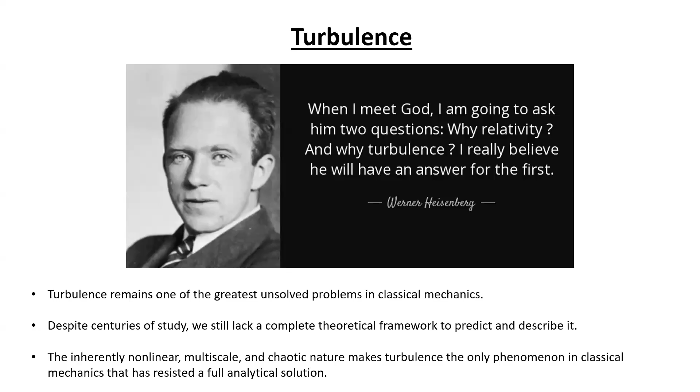So, no doubt, turbulence remains one of the greatest unsolved problems in classical mechanics. In spite of studying turbulence over centuries, we still lack a complete theoretical framework to predict and describe it. The inherently nonlinear, multiscale and chaotic nature of turbulence makes it the only phenomenon in classical mechanics that has resisted a full analytical solution. So, in short, turbulence is still not fully known.

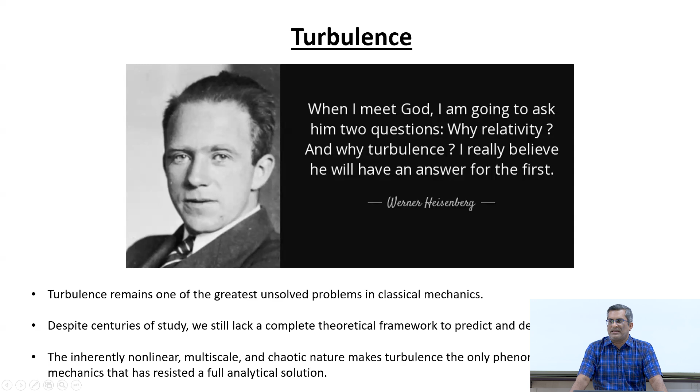Okay, so now why is this the case? Let us see that. For that purpose, first we will have to look at some key characteristics of turbulent flow.

Turbulent flow as such is so vast and includes so many different aspects that it is not possible to include everything in one full course.

So here what we are going to do is I will only give a brief background on the theory of turbulence, such that it will be helpful later when we discuss numerical techniques for turbulent flow and, importantly, particle turbulence interaction. So I will only briefly present the essence of turbulence.

So what are the typical characteristics of turbulent flows? Usually, we assign unsteadiness to turbulence. We say that if a flow is unsteady, it is turbulent, which is not fully correct.

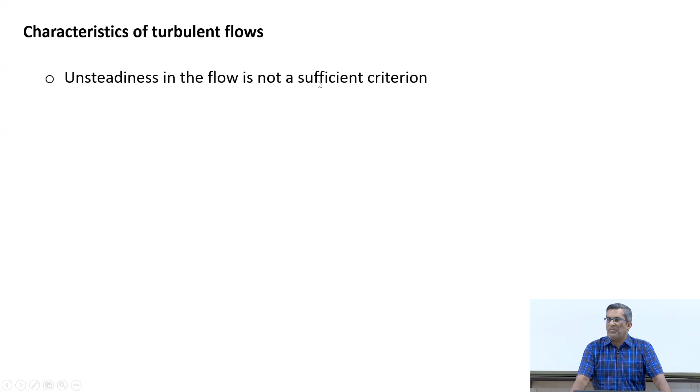Unsteadiness in the flow is not a sufficient condition. It may be a necessary condition. And this is also closely related to the misconception around this equation. When we talk about turbulence, we immediately write this equation and say, okay, now I can decompose the velocity of the fluid into mean and fluctuation. But just because you can write this equation for a flow does not mean that the flow is turbulent.

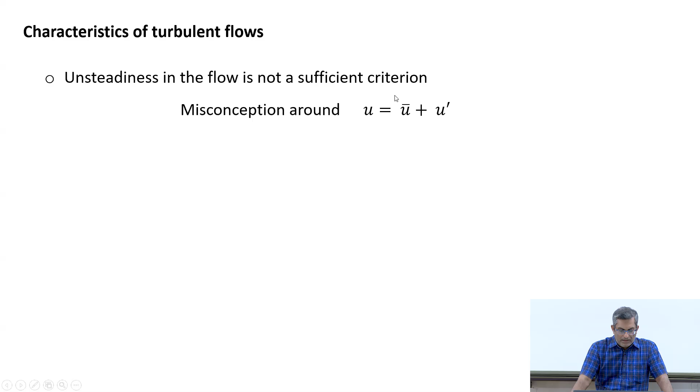Why is this so? Let us look at the flow behavior past a cylinder. Here you have a laminar flow past a cylinder, with Reynolds number about 100. Here you can clearly see the vortex shedding. For this Reynolds number around 100 or so, we will see periodic shedding of vortices behind the cylinder.

If you consider any point, say here in the wake, and plot velocity, you can expect something like this. If I take the mean of this flow field, this will be my u mean, and this would represent the fluctuations. So does this mean that the flow is turbulent here? The answer is no. This is not turbulent, even if we can have velocity fluctuations.

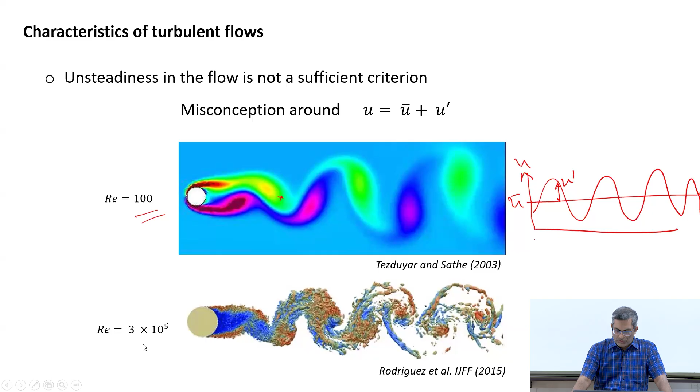Now consider this case where the Reynolds number is very high, about 3 lakhs or so. In this case, if we repeat the same exercise and plot the velocity profile, we will see something like this.

So in this case also we can find mean and we can have fluctuations. So should we call this turbulence? You will say yes. But what is the difference? Only that the signal is different, but in both cases we can define mean, we can define fluctuation. So why do we call this turbulent flow only?

For that purpose, you can have a look at these photographs first. These are taken from various flows. For example, in a sea, this is the behavior of a smoke stream generating from, let us say, an incense stick. This is how coffee and milk mixes. Here you see the clouds. This is a jet.

What you see here is the presence of a range of length scales. Time scales we cannot gauge from here, but you can definitely see that it involves a range of length scales. That means, if you look at this jet, you can see some large scale vortices, some intermediate scale vortices, as well as some small scale structures.

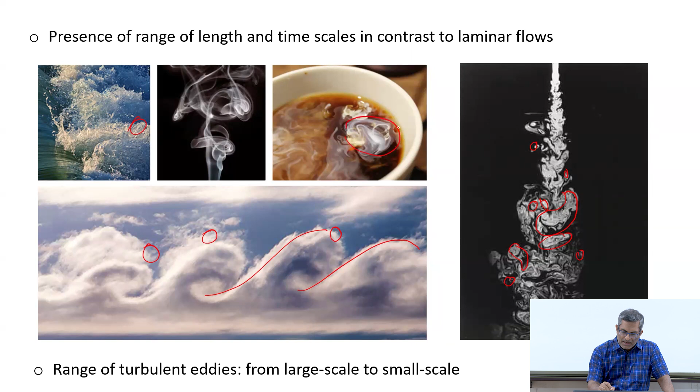Similarly here you have some large scale structures present, but imagine you can zoom into the flow, you will see some fine scale features also in all of these cases. So there are large scale features, there are small scale features. Basically in turbulent flows, you have a spectrum of length scales, and that is why time scales are also involved, in contrast to laminar flow.

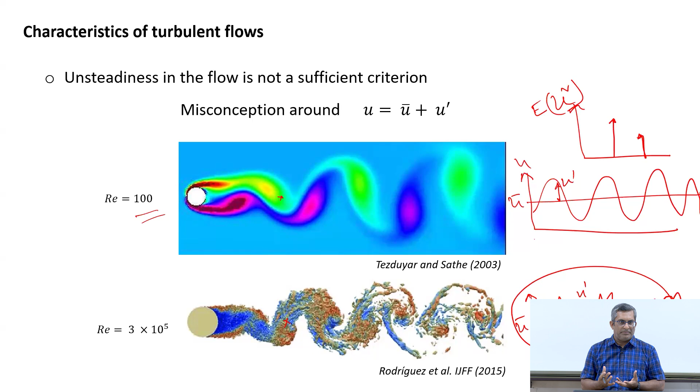Going back to the previous case, if you consider the power spectrum or Fourier spectrum of this flow field, you will get one peak, or two peaks, or one or more discrete peaks. This is the spectrum corresponding to the energy of the flow, so in this case you have discrete length and time scales involved. For instance, the length scale would scale with the diameter of the cylinder, and the time scale would scale with the free stream velocity, so diameter divided by free stream velocity. You have some discrete length and time scales present.

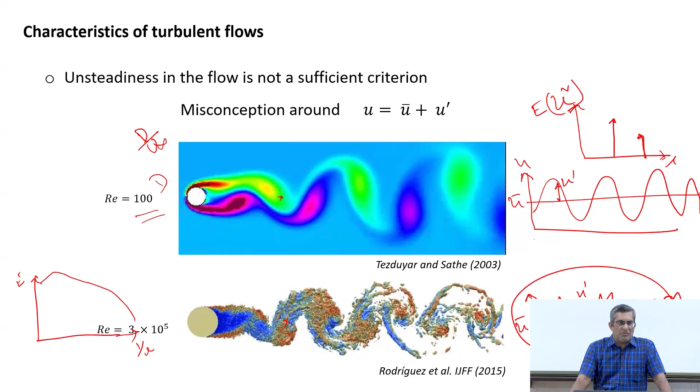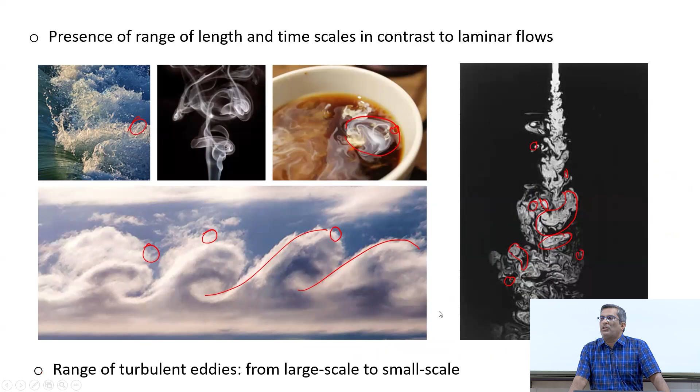In contrast, if we do the same thing in case of turbulent flow, you would see something like this. The exact mathematical nature of this curve we will see later, but the point here is that you have continuous evolution of the energy of the flow across different length scales of the flow. Let us say this represents the length scale of the flow, or actually the inverse of length scale - it does not matter. That is the main difference we must remember in case of turbulent flows. Here we have a range of eddies ranging from large scale to small scale. At least qualitatively this is evident.

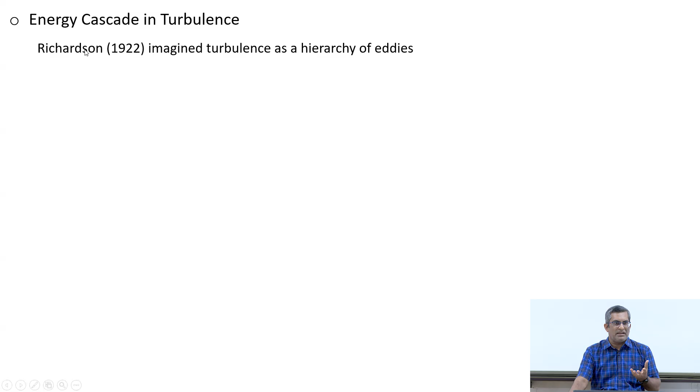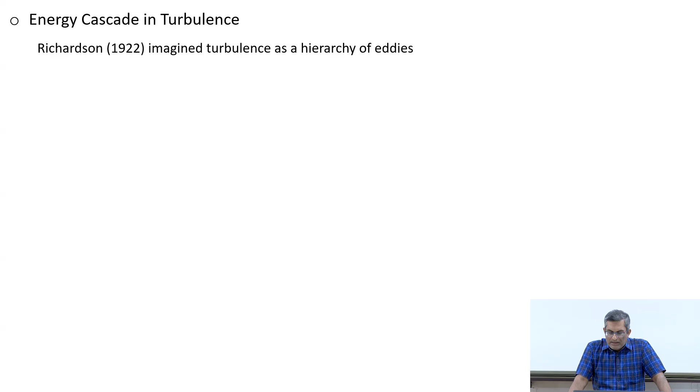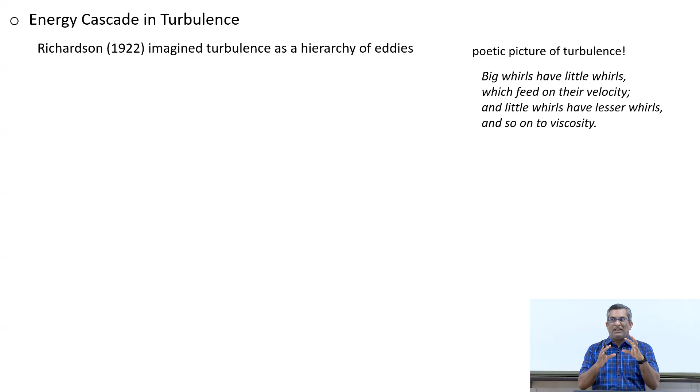This takes us to the next characteristic of turbulent flow, known as energy cascade in turbulence. For that we need to look at Richardson's imagination on turbulence. Nearly 100 years ago he could imagine that there is no specific time and length scale involved in a turbulent flow. In fact, he gave a poetic picture of turbulence, a famous poem: 'Big whirls have little whirls which feed on their velocity, and little whirls have lesser whirls and so on to viscosity.' I am unable to imagine how he could imagine at that point of time that a turbulent flow consists not only of eddies of different sizes, but that there are large scale whirls - what he called whirls, basically vortices, the eddies - and then that gets smaller and smaller, and finally viscosity plays a role. This is very important and interesting, how he could think about this only by looking at the turbulent flows.

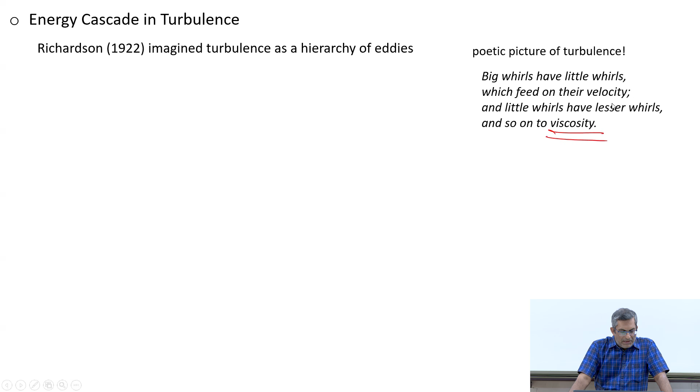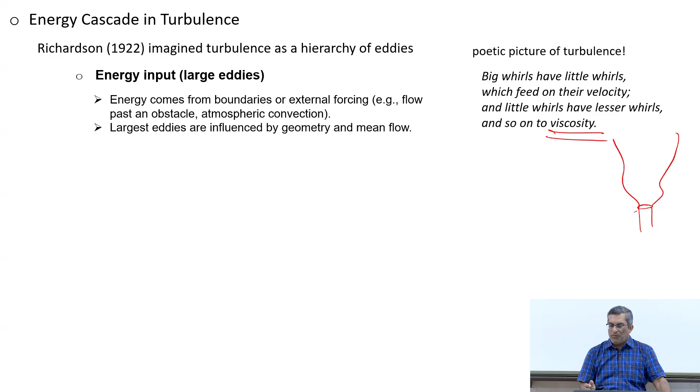This brings us to the energy cascade theory in turbulence, which says that we have large scale eddies which receive energy. Basically energy comes from boundaries or external forcing, and the large scale eddies are influenced by geometry or the mean flow. For example, if you have a jet, then the large scale eddy would be influenced by the radius of the jet. If you have a pipe flow, then the large scale eddies are influenced by the geometry of the flow, meaning the diameter of the pipe or height of the channel. If you have flow past a cylinder, then it is the size of the cylinder. These are the boundaries which influence the large scale eddies, and they get energy from the mean flow, especially from the gradient in mean flow.

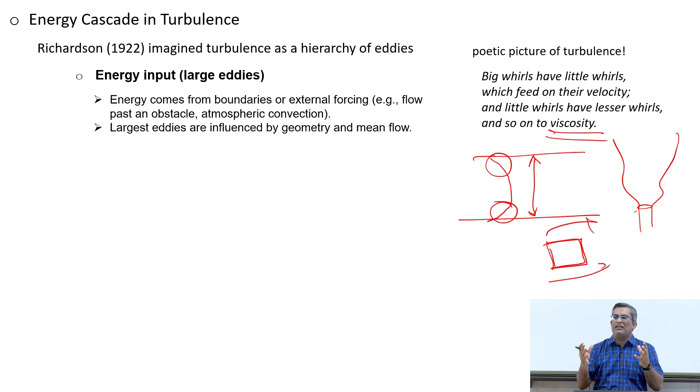For example, let's say here you have a profile like this. This velocity gradient, which causes shear, generates turbulence. At this moment you can think like that. So basically they are called energy containing eddies - the large scale eddies are called energy containing eddies.

Then we have medium scale eddies, which we call inertial scale eddies. In this case the eddies interact non-linearly, breaking down into smaller eddies. So basically large eddies break down into smaller eddies, but the energy transfer is conservative - there is no dissipation of energy. The energy, instead of being contained in a few large eddies, now breaks down to smaller eddies. So now the energy is contained in smaller eddies, and those eddies further break down, producing even smaller eddies, but the energy remains similar.

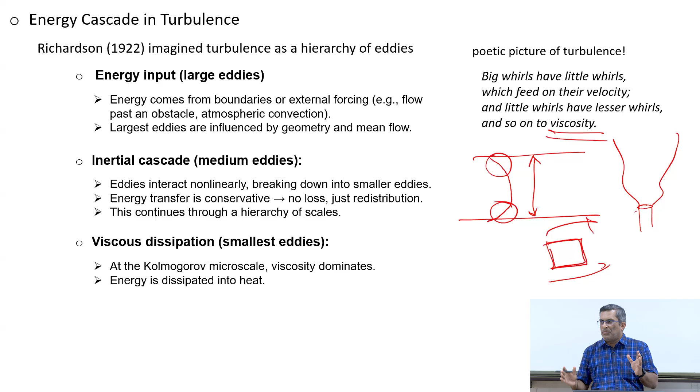This continues, but the question is how long this process can continue. It continues till we reach the smallest eddies - smallest eddy meaning where we have viscous dissipation present. By the time we reach such small length scale, viscosity now dominates, so it does not allow simple cascading of the energy. Rather, the energy there is dissipated - it is lost. Lost to what? Lost to thermal energy. So at the smallest scale, the eddies lose their energy due to viscous dissipation, but it happens at that scale only. This is known as the Kolmogorov microscale, where energy is dissipated to heat.

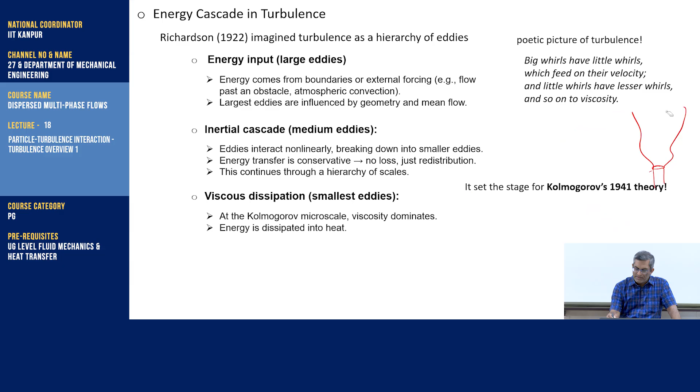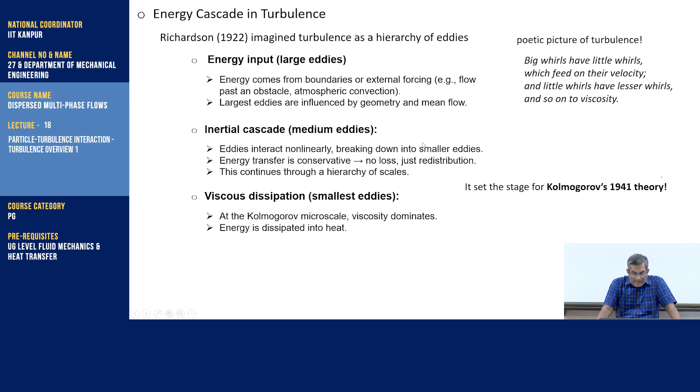So as of now, you may be thinking, okay, all this sounds good, but is there a theoretical basis behind this, or is it only hypothetical? But this actually laid the foundation for Kolmogorov's theory, which we will see soon.

This energy cascading is closely related to an important characteristic of turbulent flows: rapid diffusion of momentum and heat compared to laminar flow. This happens because large eddies move fluid parcels long distances, while small eddies homogenize at fine scale. So momentum and heat transfer takes place across the energy spectrum at different scales - large scale convective transport happens via large eddies, while small eddies affect molecular level mixing.

The small eddies we refer to are still larger than the mean free path of the molecules, so the continuum assumption remains valid - keep this in mind. We cannot go to that scale because viscous effects are always dominant at a scale much higher than the mean free path. Because of this, we have a combined effect of fast multi-scale mixing of momentum, heat and scalars.

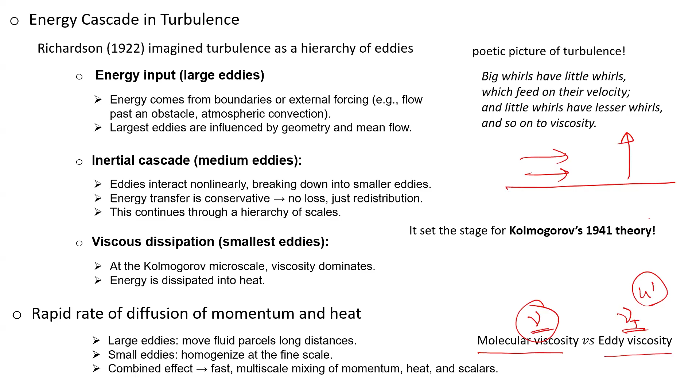This is only a mathematical quantity which contains the velocity fluctuations also. Eventually, it is the velocity fluctuations which additionally facilitate extra momentum transfer in turbulent flows. So basically, eddy viscosity is a kind of model to demonstrate why momentum transfer happens faster in turbulent flows.

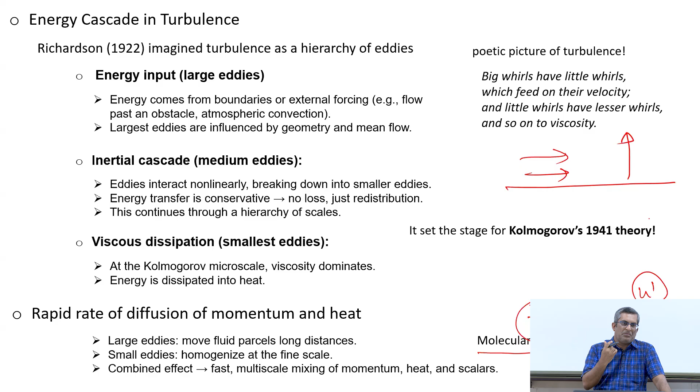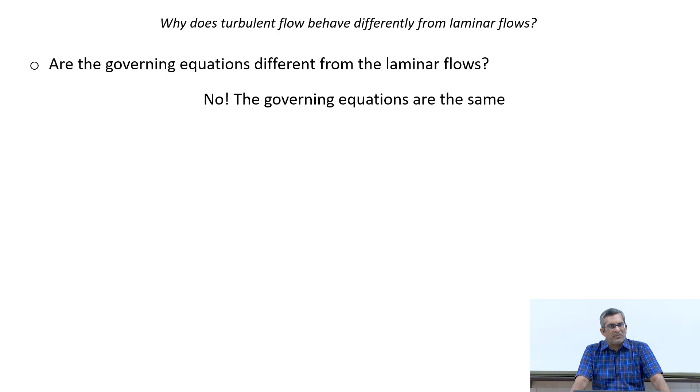Next question: why does turbulent flow behave differently from laminar flow? What is the reason? Is it because the governing equations are different from laminar flows? The answer is no - the governing equations are the same. If we consider an isothermal flow with no heat or mass transfer, the governing equations are the continuity equation and the Navier-Stokes equation. The equations remain the same - so if the equations are the same, how come the solutions are different?

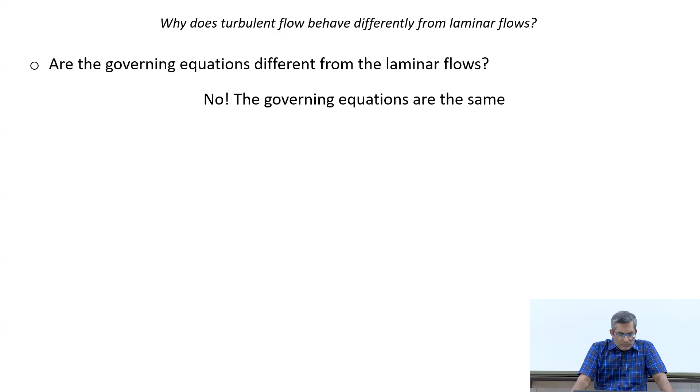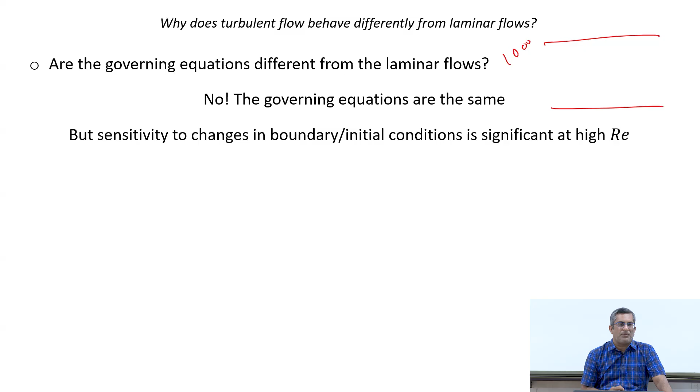What happens is that even if the equations are the same, changes in the boundary and initial conditions have a significant role, especially at high Reynolds number. Consider the example of flow in a pipe: imagine one case with Reynolds number of 1000, and another with Reynolds number of 10,000. If you do an experiment and look at the streamlines in these two cases, the difference will be very clearly visible - that is what Reynolds actually did.

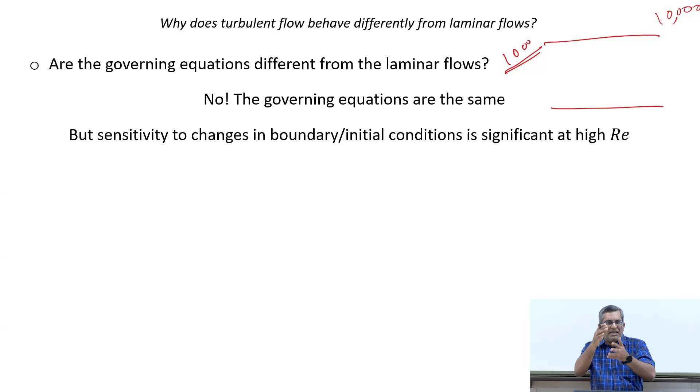If you remember Reynolds' experiment, he released a dye at the center of the pipe and kept the flow laminar so you could see the streamline properly. But as you go on increasing the Reynolds number, which means increasing the velocity in the pipe, you could see vigorous mixing. So the question is why that happens.

If you consider this from a numerical solution point of view, you have the same equations, the same boundary conditions. Why is the solution different? You might have changed the Reynolds number, which in this case means the diameter is constant and you are increasing the velocity. So why is the solution different? That is what is interesting.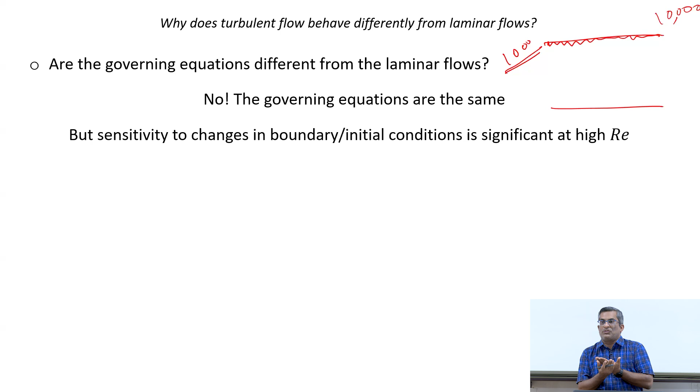Why that happens is because even if we assume the boundary conditions are same, they actually are not, because you have some roughness at the boundary. It is impossible to create a perfectly smooth surface. So you have some roughness at the boundary.

Not only that, in practical cases, the flow rate—let's say you maintain 1000 LPM using a rotameter set to 1000 LPM, and you see it stays at 1000 LPM only. However, there is always some uncertainty associated with the measurement. That is why we say it is actually 1000 LPM plus or minus some value, some uncertainty or accuracy associated with this.

Why do we have that? Because whatever device you use to maintain the flow, let's say a pump, it is impossible that it will send exactly 1000 LPM all the time. So this itself may vary. If it is highly accurate, the percentage change would reduce, but still it is impossible for it to be exactly 0. So these fluctuations at the boundary cause the difference even if we have the same set of equations.

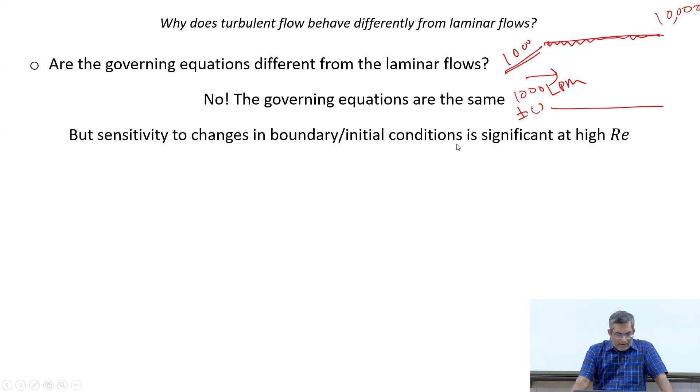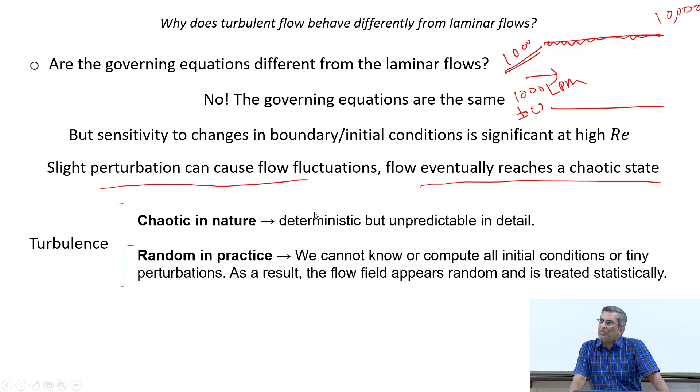So as I mentioned, slight perturbation can cause flow fluctuations which eventually reach a chaotic state. What is meant by chaotic state? It is not the same as a random state—sometimes we use these synonymously, but they are not the same. When we say something is chaotic in nature, this means the governing equations are deterministic, but the details are unpredictable. You cannot predict the details, in this case the solutions.

While something is random in practice means there is inherent randomness. For example, you roll a die. The outcome is always random—whatever value you get, it is always 1 in 6 probability. That is called complete randomness.

But what we have here is actually chaotic. Even if it is chaotic, turbulence is random in practice. Why is it random in practice? Because it is impossible to know how the initial and boundary conditions vary. It is not possible for us to have a model which will actually represent how, let's say, the flow rate varies.

At most you can say it varies with a certain probability, and you know the probability distribution which is Gaussian in nature—so the mean is 1000, but it can vary in some range. You can say this, but you cannot say that the next moment in time it will become 1000 plus 1. We cannot have that control.

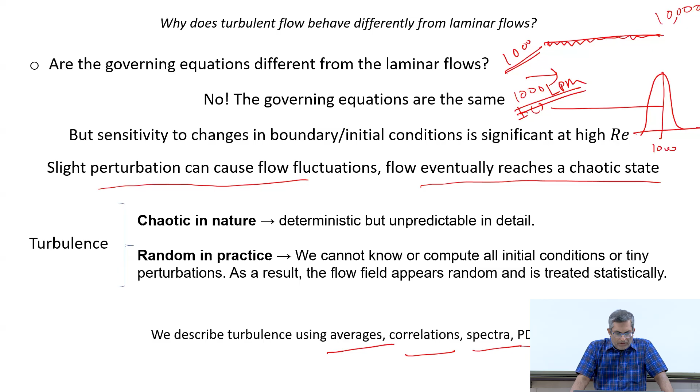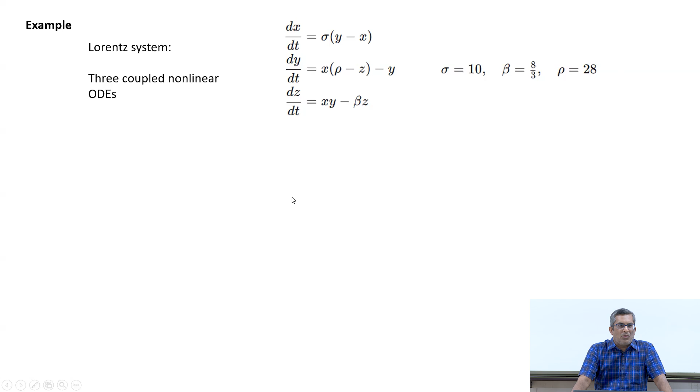Next, to highlight this sensitivity to the initial conditions, let's look at the Lorenz system. Lorenz came up with this system of equations, which are basically three coupled nonlinear ordinary differential equations, and these are some constants. What is interesting here is that you first start with some initial conditions—these are basically initial value problems.

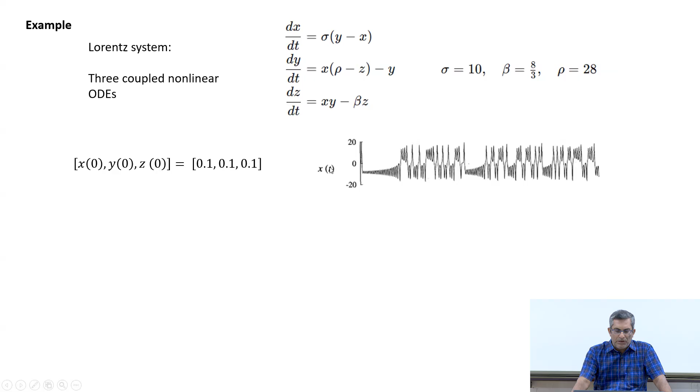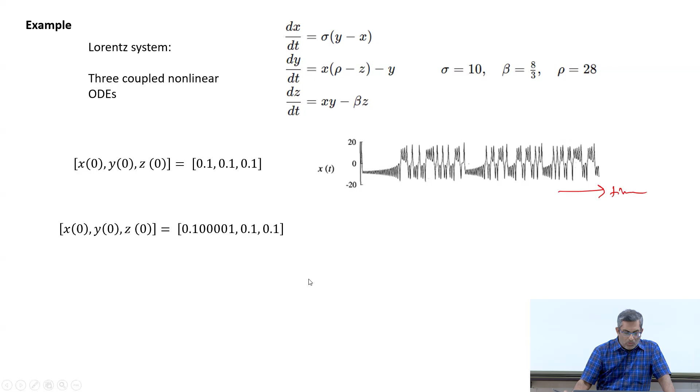So you start with some initial condition, solve this, and get, let's say, the value of x, which varies this way with respect to time. Now you see, I change this by this much amount—a very small change to one of the input parameters—and you see this.

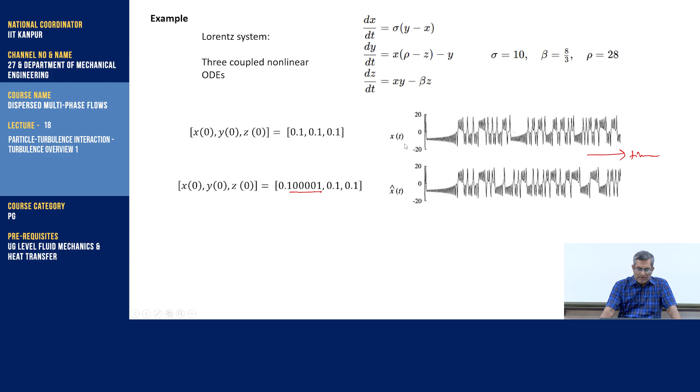So you may say that, okay, they look similar, but now let's calculate the difference, x minus x cap. If we calculate, we get something like this. What you see here is that till time about 35 seconds or so, the solution matches very well.

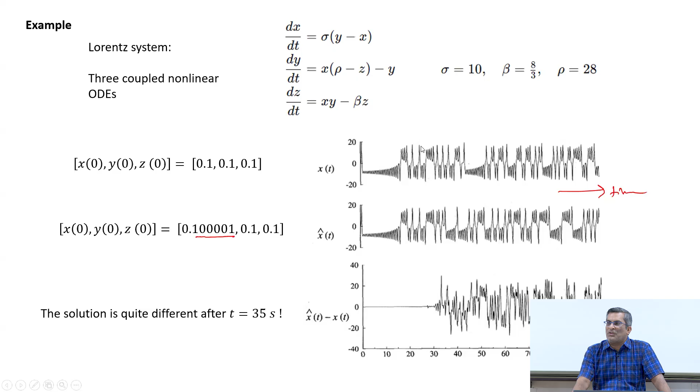But after that you see large changes with this small change. So why is this happening? This is happening because of the nature of the equations and these constants that you have used. And this is only a very simple case.

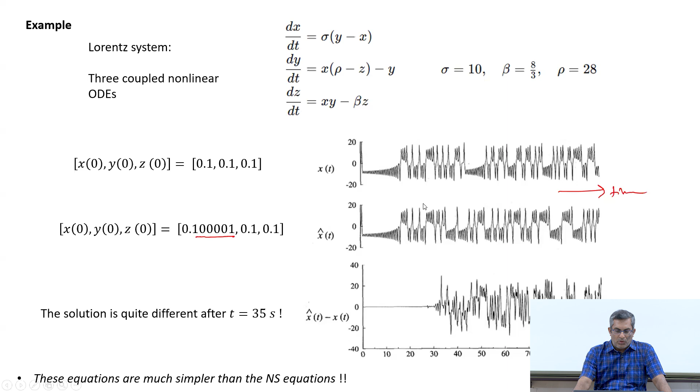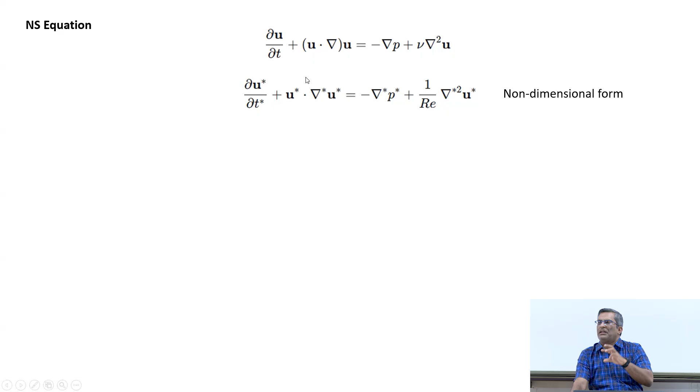Now imagine Navier-Stokes equation, which is highly nonlinear. So what happens in case of Navier-Stokes equation? This is the Navier-Stokes equation for incompressible flow. If we write this in non-dimensional form by choosing appropriate scales, length scale, velocity scale, time scale, we get this where Reynolds number appears. You are aware of this.

Now, what is the role of the Reynolds number? As long as the Reynolds number is low, viscosity dominates. And in that case, the nonlinear terms are weak compared to the viscous dissipation term. So the flow is smooth, laminar and predictable.

There is no chaos. So you can argue that, well, in this case, don't we have roughness? Don't we have fluctuations in the mass flow rate in the case of a pipe flow? You do. You have all this. But all those fluctuations are dampened out because of viscous effect.

So that is the main difference. These fluctuations are present even in the case of laminar flow. That is why you get a predictable solution. However, as Reynolds number increases, the nonlinear advection term overwhelms the viscosity.

The small disturbances are amplified instead of damped because now the Reynolds number is high, which is the ratio of inertia to viscous force, meaning the inertial force is high. This leads to instability, causing the flow to transition to turbulence. Finally, the flow becomes chaotic, sensitive to the initial condition. That is the reason why we have a broad band spectrum.

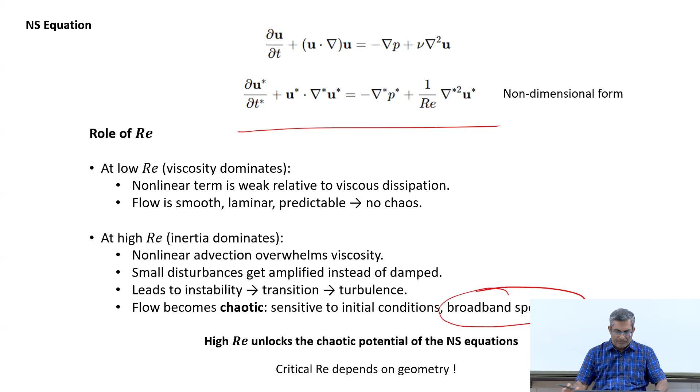Now we'll look at Kolmogorov's hypothesis. We have talked about the energy cascading mostly from a qualitative point of view. Kolmogorov tried to bring in some quantitative aspects to Richardson's imagination. Basically, Kolmogorov's hypothesis lays the statistical foundation for turbulence. This is a very important discovery in turbulent flows.

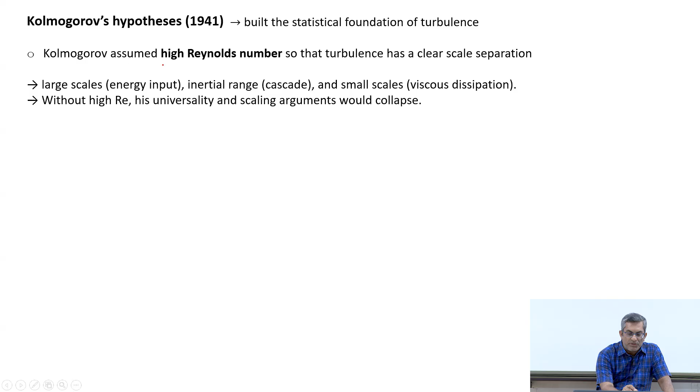Let's see what is Kolmogorov's hypothesis. First, Kolmogorov assumed high Reynolds number. Before we talk about his hypothesis, it's important to know that this is valid only when the Reynolds number is high, so that turbulence has a clear scale separation. What is meant by scale separation is that we have different scales, large scales, intermediate scales, small scales.

Without high Reynolds number, the arguments of universality and scaling, as we will see, would all collapse. For example, we should not consider a Reynolds number of, say, 3000, 4000, 5000 in case of pipe flow if we want to use Kolmogorov's hypothesis. In this case, it should be like 10,000 or more.

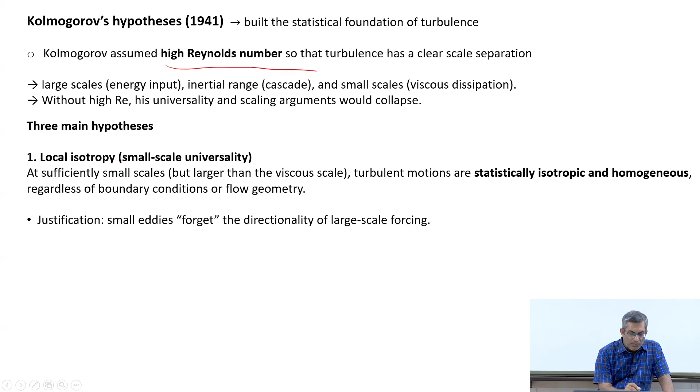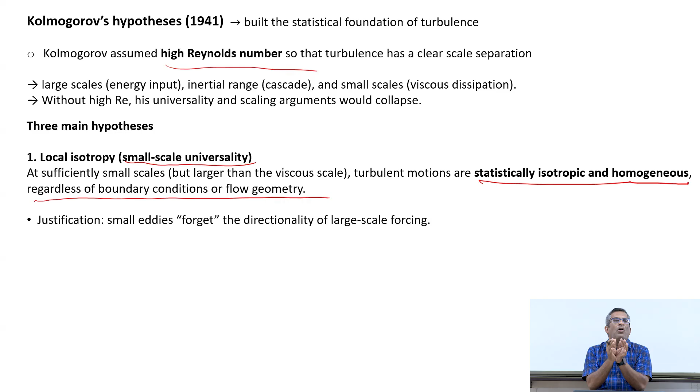Now this is interesting. Independent of what type of turbulent flow you consider, let it be a jet flow, a flow past a cylinder, pipe flow, or flow over a flat plate, independent of that, the behavior is similar at the small scales, and that is what is meant by small scale universality.

Now, what is statistically isotropic and homogeneous flow? In layman terms, let me first explain. Isotropy means there is no directional preference. So what is independent of direction? You can think of it like this.

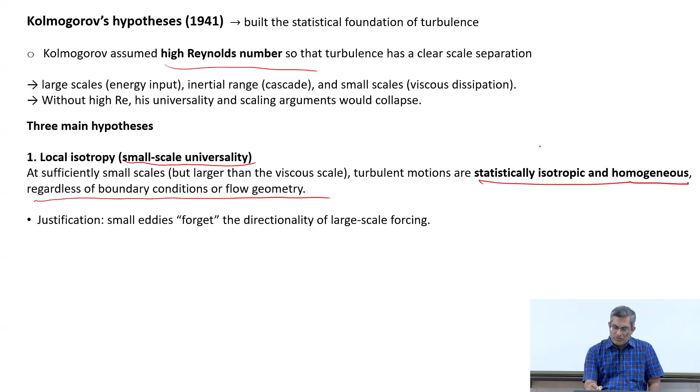Let's say you calculate the standard deviation of the velocity fluctuations. How do we calculate standard deviation? Basically you subtract the mean, square it, divide by total number of samples, and take the square root. So this is the standard deviation of velocity.

Similarly, we can calculate u dash, v dash, w dash. Are these instantaneous quantities? Here I have used u dash to represent the standard deviation, but if we write it like this, it represents the instantaneous value. So we have to be careful. To avoid confusion, let me just say this is the standard deviation, sigma u, sigma v, sigma w.

We have three standard deviations defined in three different directions. But can we say that at any instant you have velocity fluctuations u dash, v dash, w dash, or you have the velocity fluctuations sigma u, sigma v, sigma w? We can say that at any instant you have u dash, v dash, w dash - this represents the velocity fluctuations. But these three represent the standard deviations.

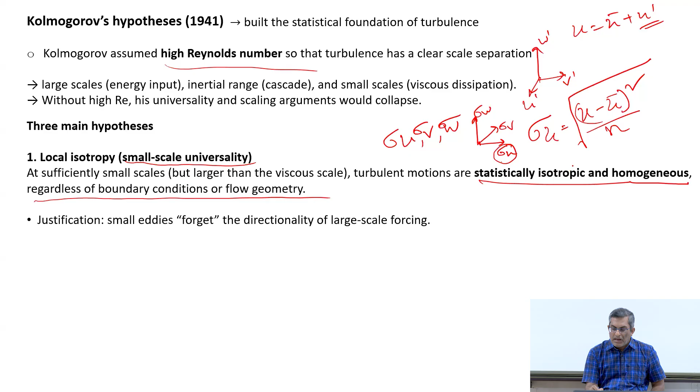So this is not defined at an instant - this is a statistical quantity. That is what we have to understand. These are defined, and when we say the flow is isotropic, these three are the same, but not this. This is what we have to understand.

U dash, v dash, w dash are not the same. At any instant they are not the same. But if we calculate the statistics, if we calculate the standard deviation, then they are the same. That is why we have statistical isotropic flow. Not only that, it is homogeneous also.

So what does this mean? Let's say at this point you have sigma u, sigma v, sigma w. At another point, let's say somewhere here, I calculate the same parameters but at a different location - this is x plus delta x, y plus delta y, z plus delta z. So it's a different location. Now if I say the sigma u here is equal to sigma u there, if they are the same...

...then this is homogeneous in the x direction. Similarly, if sigma v here is the same as sigma v there, then it is homogeneous in the y direction, and similarly for the z direction. It's possible that you have homogeneity only along one direction, not the other two. But if everything is the same at both locations, all values, then we call that isotropic as well as homogeneous.

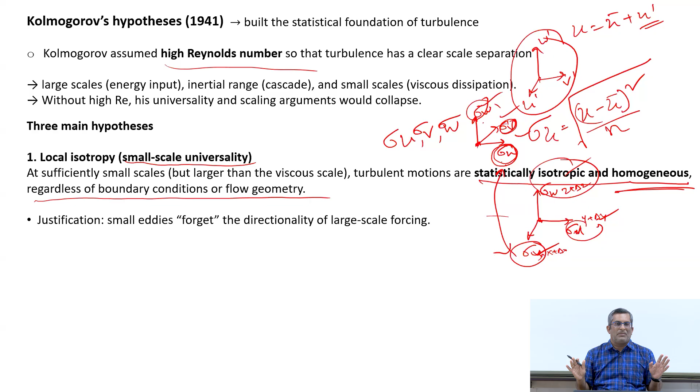Kolmogorov argued, or hypothesized, that at small scales, the velocity fluctuation behavior is universal and homogeneous isotropic. Why is it universal? This means that at that scale, they have forgotten what happens at the large scale. So whatever the boundary condition does not matter, whatever type of flow you consider does not matter.

Second, the existence of the inertial range. He hypothesized that between the large scale and small scale eddies, we have the inertial scale eddies. This is called the inertial subrange, where energy is transferred from scale to scale without any production or dissipation.

What is production of turbulence? Mainly by the gradient in the mean flow, if you have a strong shear - that's what happens in the case of large scale eddies. What is dissipation? Where the energy is dissipated to thermal energy - that happens at small scale. But in this inertial range, nothing happens - no production, no dissipation, only inertial effects matter.

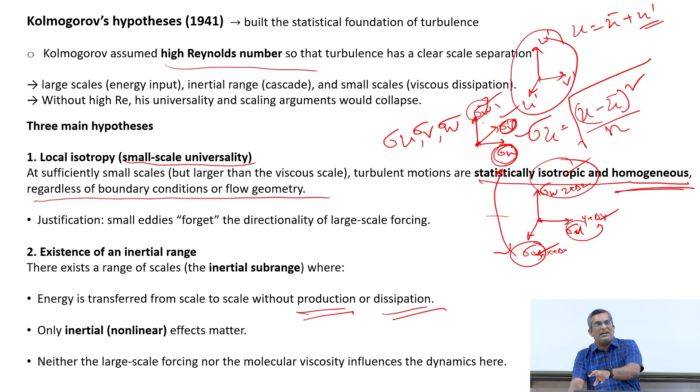Neither large scale forcing nor molecular viscosity influences the dynamics here. Now, all these have a very important bearing on the energy transfer rate that he derived later.

Then we have the similarity hypothesis. He came up with a very simple logic to calculate the small scales, or the smallest scales, of turbulence. He argued that the statistical properties of turbulence, when we have small scales, depend only on two parameters: one is kinematic viscosity or momentum diffusivity, the other is the dissipation rate - the rate at which turbulent kinetic energy is converted to thermal energy.

And this is defined per unit mass. Now at this moment, you only need to look at the units. Here I have given SI units, but you can generalize this. This is the energy transfer rate, so the numerator here represents energy per unit mass.

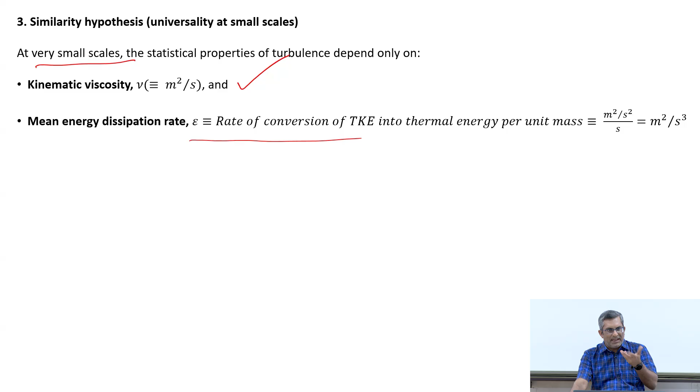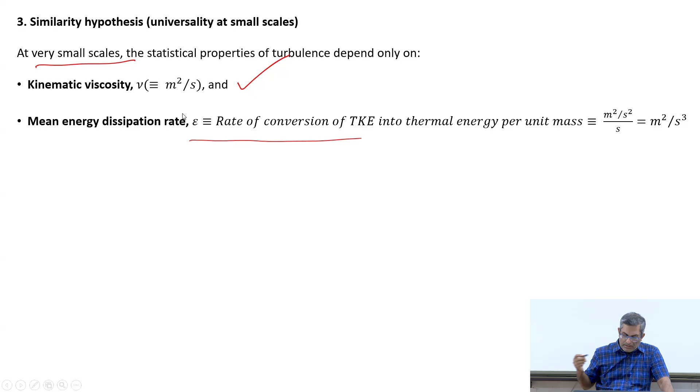So, kinetic energy per unit mass, and this is time, so its unit is meter square per second cube. Okay, so now here we have this unit and here we have this unit.

Now I ask you to come up with the unit of a time scale. So what would you do? If you just divide nu with the dissipation rate, you will get second square. So if you take square root of this, you get Kolmogorov time scale, that is the smallest time scale of the smallest eddy.

Similarly, by only considering the dimensions, for example, now you take cube of nu and divide, you will get dimension of length, and he could derive the expression for Kolmogorov length scale, the smallest scale. Similarly, velocity scale, and this is what you get. Okay, and this is purely based on dimensional arguments.

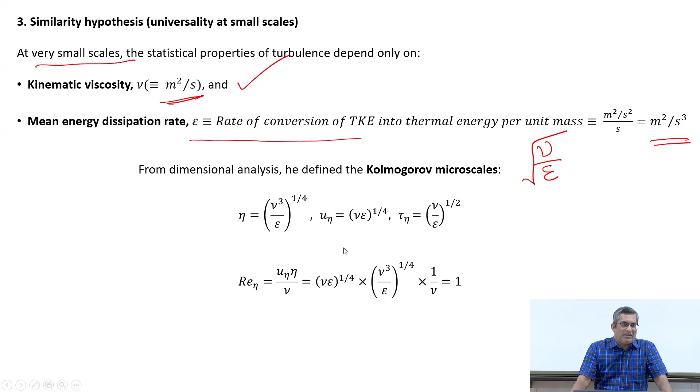But what is interesting is that now you calculate the Reynolds number and you see that it is 1. So what does this mean? This means that this is the smallest scale of turbulence where viscous forces dominate over inertia. So once you reach down to this scale, after that the viscous forces are now important.

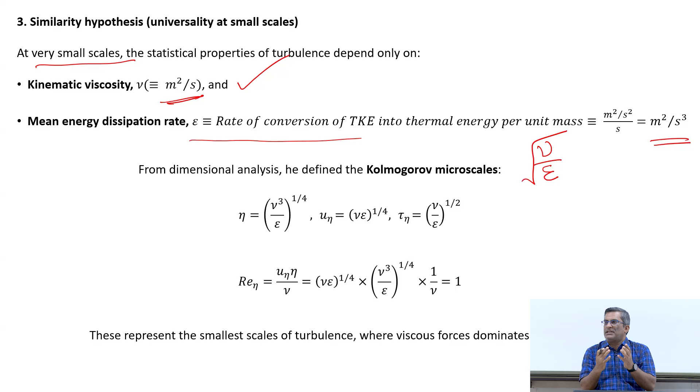So if you consider the periodicity of the eddies, you have large scale eddies, this means that you have a larger spatial period. So you calculate now this parameter for the space, then you get wave number.

This basically means that higher wave number means we have smaller eddies. So when will this wave number be higher? When the time period, or in this case the spatial period, is smaller. So that is why you have smaller eddies. Higher wave number means smaller eddies.

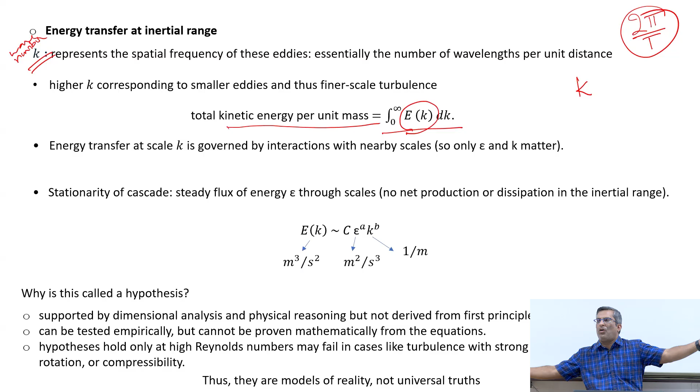So now if you want to calculate the total kinetic energy, then you need to integrate the energy density function. Now you see what is E, this is something similar to the probability density function that we had considered. So this is basically the energy density function. You have to integrate it over all eddies from 0 to infinity, so this is the total energy per unit mass.

Okay, so now if we are in the inertial range, or if we are considering the eddies in the intermediate zone, then the energy transfer rate is governed by the interaction with nearby scales. So it depends only on the dissipation rate and the wave number. You see that here the kinematic viscosity does not come into picture as in the case of smaller scale. So what Kolmogorov hypothesized is that if you are in the inertial range, viscosity has no role to play.

Okay, so now considering that there is no net production or dissipation in this range, we can say that the energy is basically proportional to the dissipation rate and the wave number.

So now we want to find what are these exponents. So what do we do? We just do dimensional matching. So just by matching dimensions, he could show that the energy can be expressed by this, and this is the famous minus 5/3 decay behavior.

As we will see, if you look at the turbulence spectrum, this tells you that in this range, as the eddy size decreases, the energy would decrease. So basically, if you take log of this, and if you assume that this is a constant, and if you take log of this, you will get a decay rate, because here you have minus.